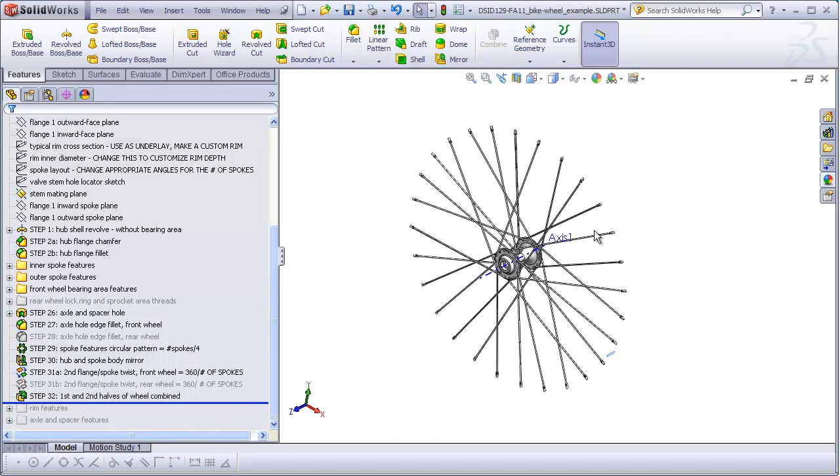This is part 4 of the bicycle wheel tutorial. In part 3 we got all the way to step 32, which gave us a full complement of spokes and a completed hub shell for the front wheel, which included the axle area, the flanges for the spokes, and the area that contains the bearings. For this part we will complete the front wheel by adding the rim.

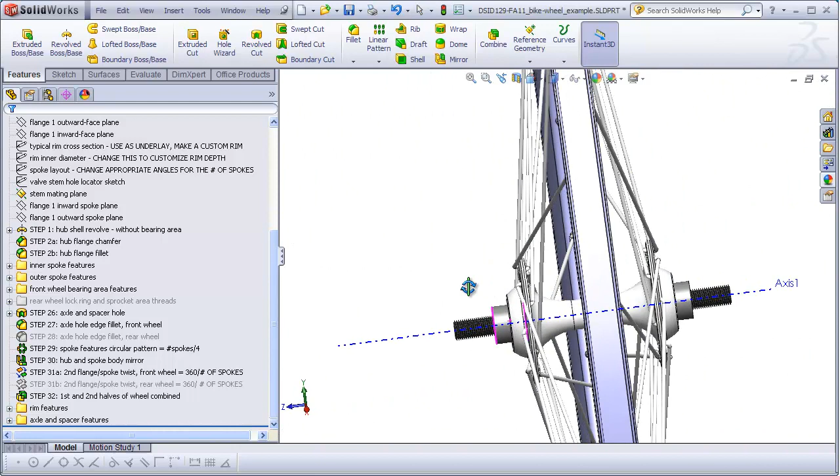This includes holes in the rim for the nipples to pass through, a hole for the stem valve, and then we'll complete all the features that go into the hub, which includes the axle with a metric 10 thread on it and the spacers that go into the bearing area.

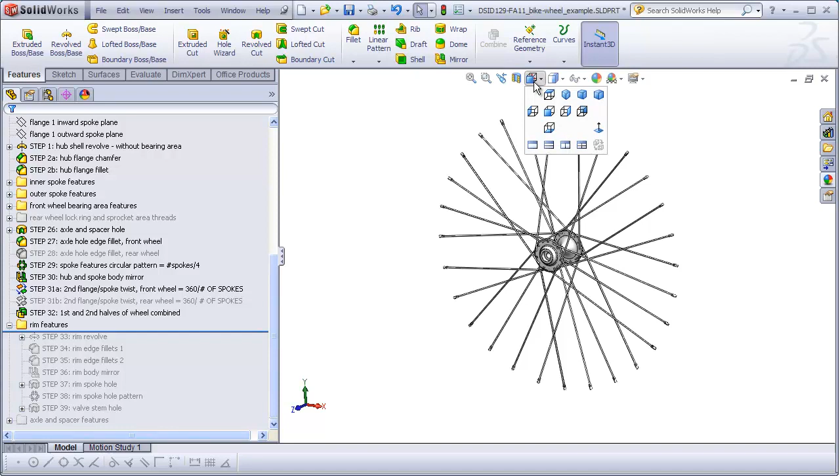So I'm going to roll the model back to step 33, which is the revolve that creates just half of the rim. Now I'll roll back before that so we can recreate this step. What I'm going to do is turn on my sketches for the typical rim cross section and the rim inner diameter.

Let's take a look at the rim cross section. This is your typical cross section of the end of a rim, which includes the feature that clinches onto the tire, 19mm width, which you will not be changing, an 11mm sidewall. And a classic bicycle rim tends to have a little bit of a crown to the inside of the rim.

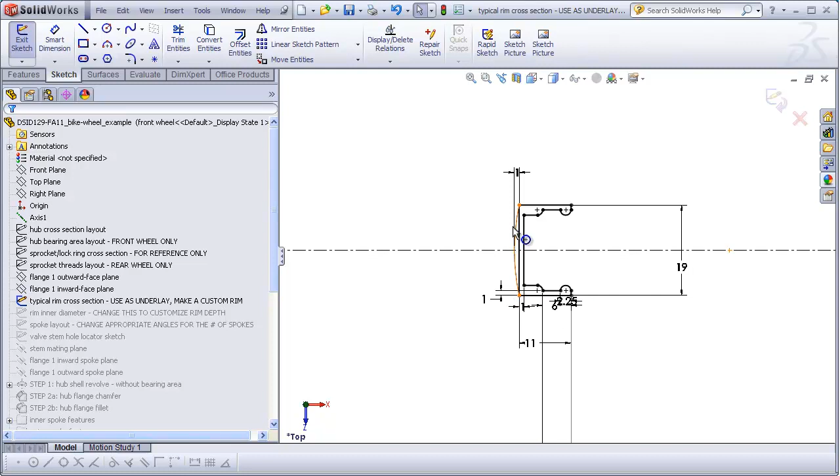This would be a traditional shaped rim, and you can go ahead and use this, but you can also customize this by making it more of an aerodynamic shape if you like. So what you'll be doing is borrowing these features, which must remain unchanged, and then adding more shape to it if you like.

A lot of bikes utilize this flat surface as a brake surface. If you would expect your bike to eventually have brakes on it, then you want to leave this area flat and then add the aerodynamic portion out here.

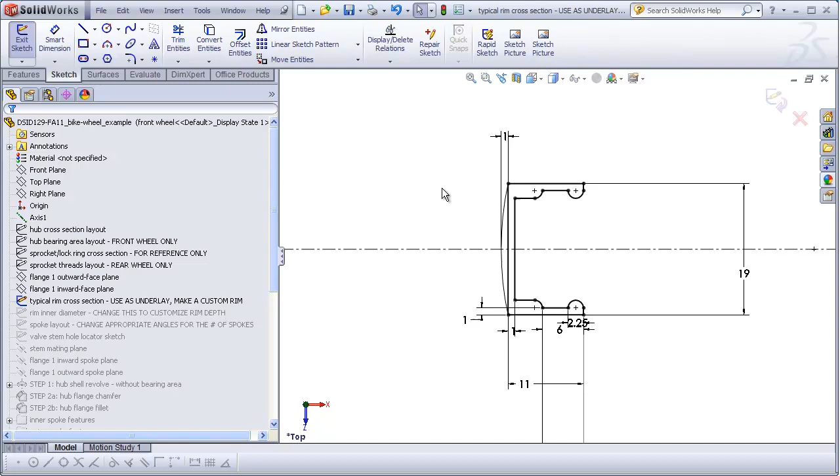If you don't expect your bike to ever have brakes, or perhaps would have disc brakes, you sometimes find rims where this surface here is not flat and is just part of the overall curved rim. You can do whatever you like, but you need to maintain this inner shape here and these shapes here.

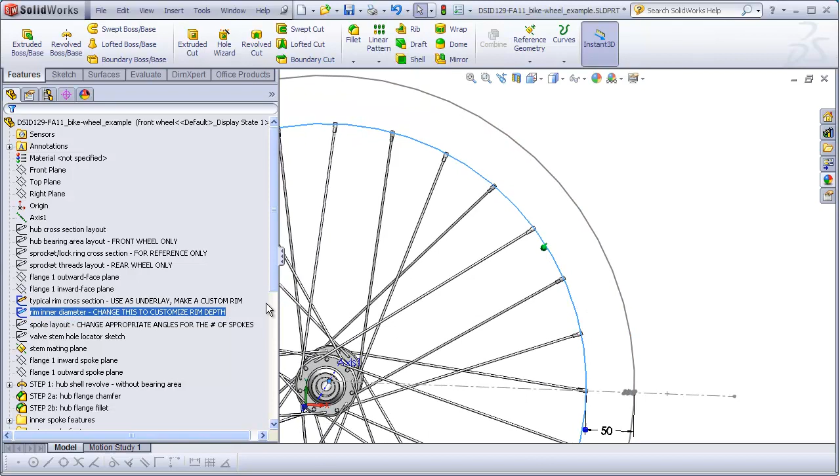Now zooming out a little bit, and taking a look at the rim inner diameter, this dimension controls the depth of the rim going from the outer edge of the rim to the inner diameter.

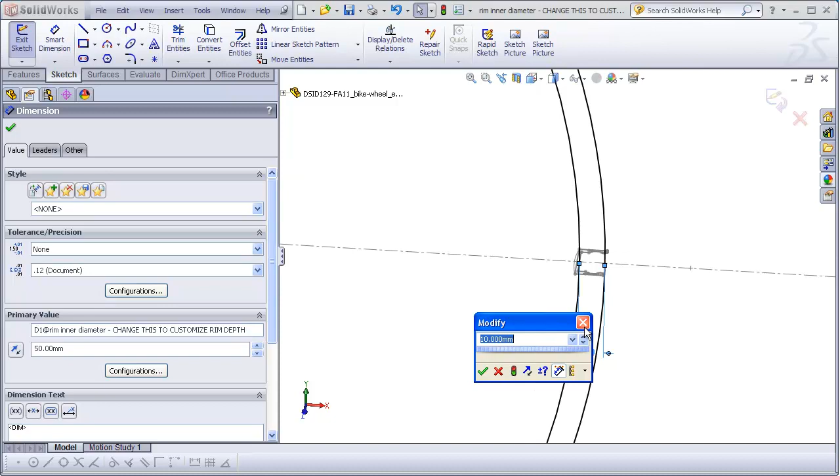A deep aerodynamic rim would have a large number like 50. A more traditional rim would have a much smaller number like 10 or 12, and would end up, if you want to have a crown to the top of the rim, matching the crown. This is a number that you will set, and this curve here, this inner diameter, will end up controlling the shape of your rim in this area, which I'll demonstrate in a few moments.

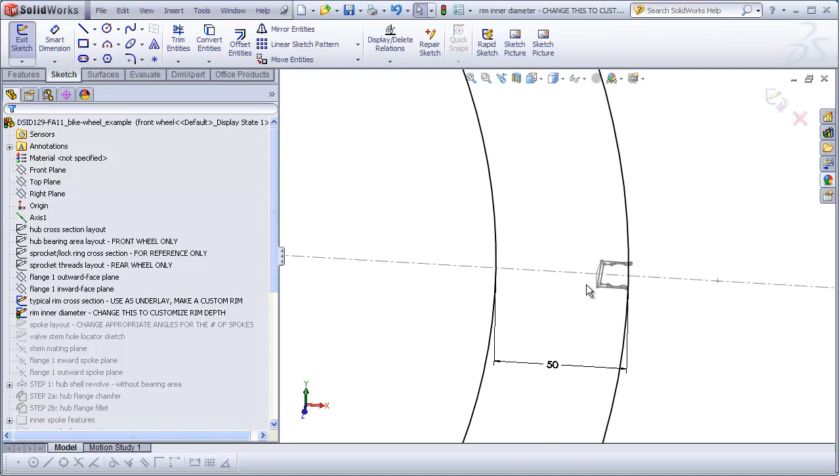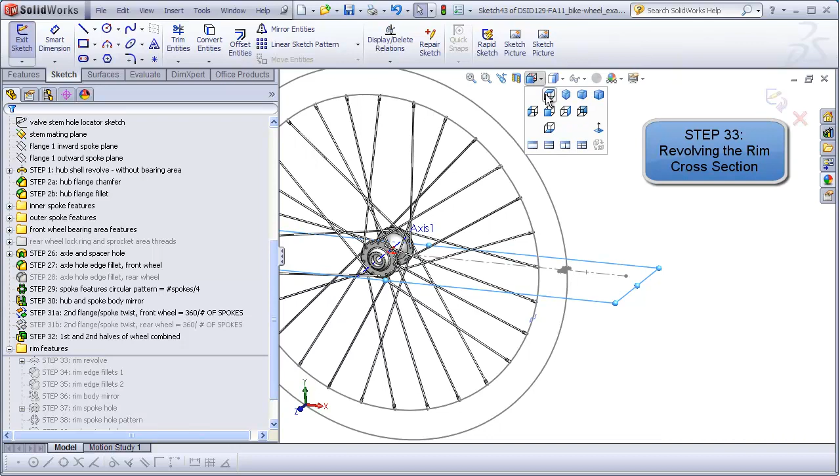So going back to our top plane, we will start a new sketch. This is step 33 we are now working on. From the top view, what I'm going to do is copy these portions of the rim, and then I'm going to add on the additional profile that I want to have.

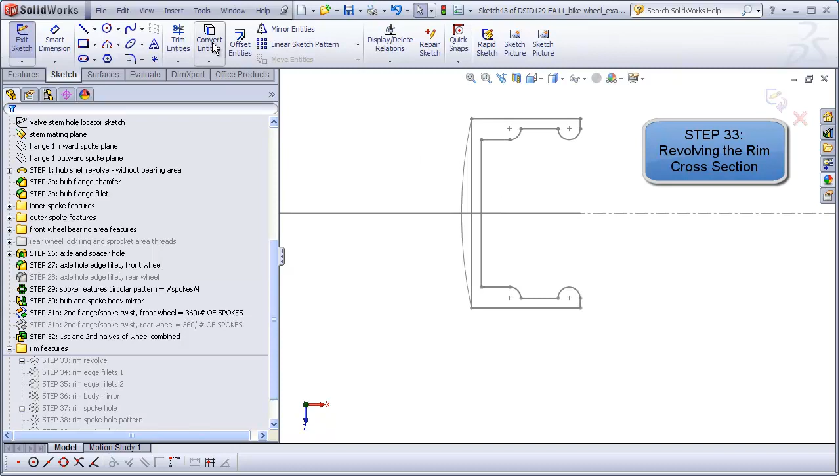In this case, I've decided I want to have an aerodynamic rim, which will have a sort of teardrop shape in this area. Using convert entities, I will copy these portions, and then what I'm going to do is add the curve that will complete half of the shape of the rim. I'm going to drag this back to here.

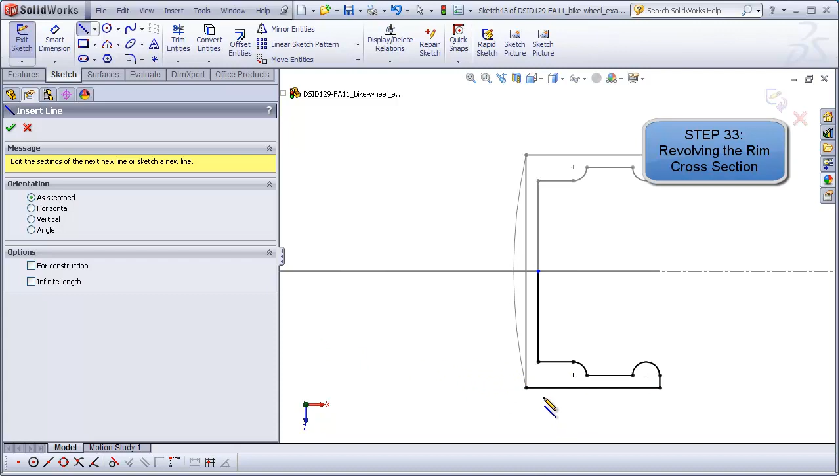A lot of rims, if this area is flat, actually have a little bit of a step before they go to the aerodynamic portion. That's because this area is machined so it's nice and flat for the brakes. So I'm just going to add a short step here.

I'm going to tilt this so that we can see that sketch that controls my inner diameter. So this was a decision I had to make earlier as to what this appropriate depth was going to be, because this also controlled how far out the spokes came on the wheel.

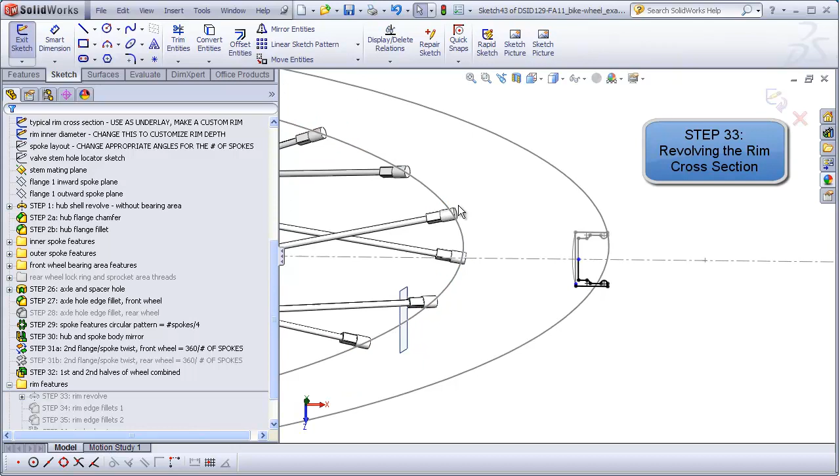So I'm going to just draw a line here. Then I'm going to draw something simple like an arc. I may need to make sure that this line comes out to this inner diameter. So I'll just take this endpoint and this line and make a pierce relation.

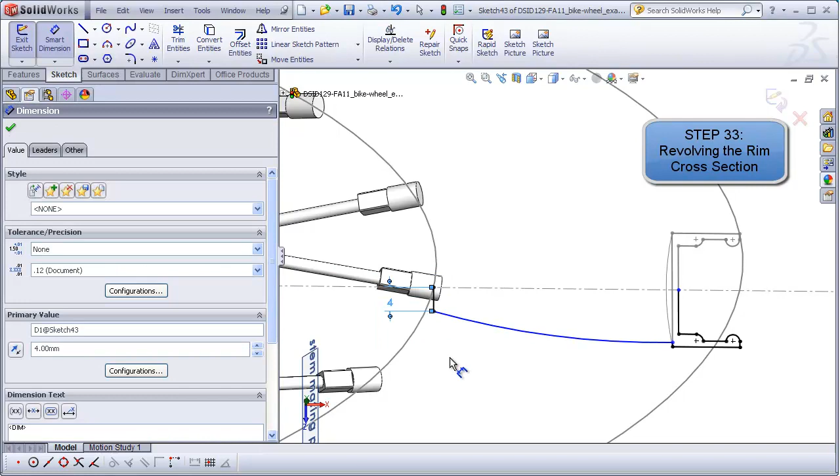And I'll make the width of my rim somewhere about 4 millimeters here. Actually, it'll be 8 millimeters once it's mirrored. And I think I'll add a horizontal sketch line here, construction line, and just make these two tangent.

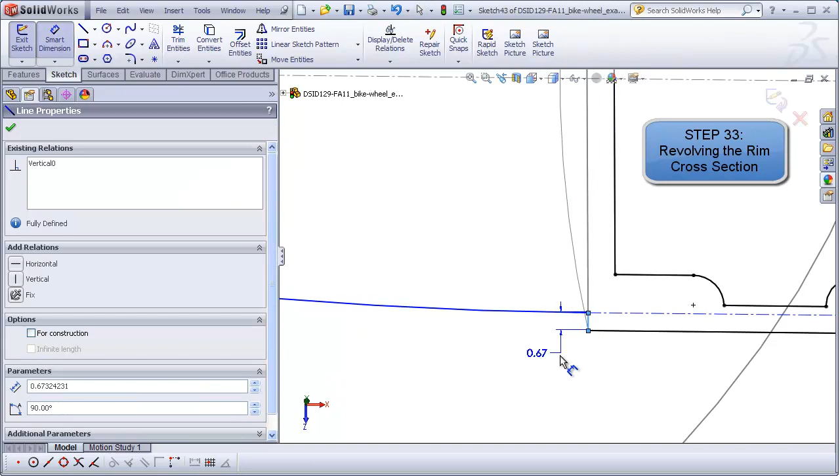Drag that inward. I said I was going to have just a little step here, maybe 0.5 millimeter. Typically on a rim, this area is painted or anodized, and this area here is machined and left free and clean for the brakes to rub on. Then I'll just complete this by adding a line here to here.

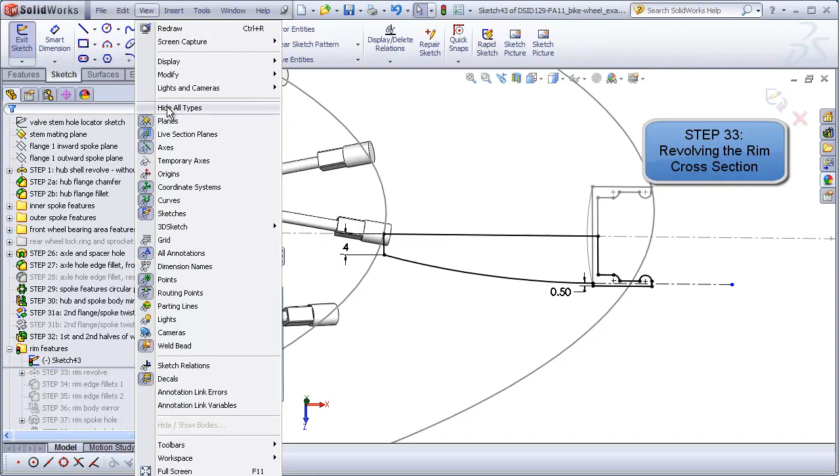Let's turn off all my sketches so now we can see what the profile of half of my rim is going to look like. We copied these details and added these parts on, and this part has a pierce relation to the inner diameter, or the rim sketch, which is this sketch here.

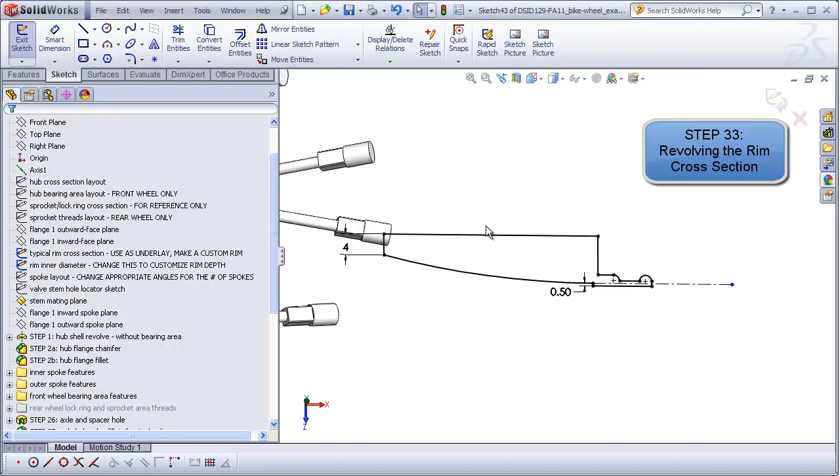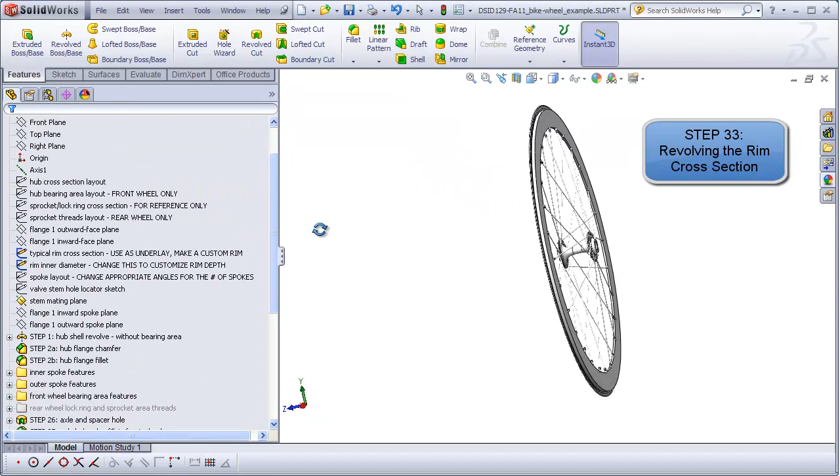All we have to do now is revolve this around the center axis. Now in a real rim, this area would be hollow also, but we're simplifying this a bit and just leaving it as a solid chunk because we're not going to be seeing this interior anyway. So all I have to do now is add a center line going from the origin out to here, and go ahead and revolve that. That gives us half of the rim.

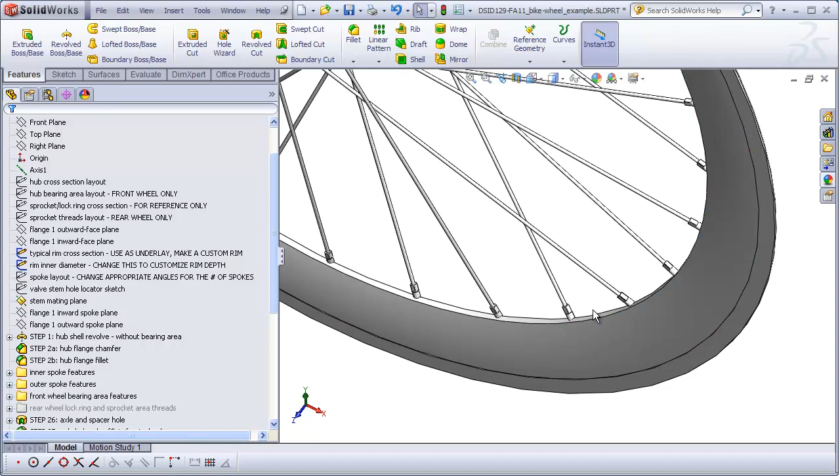Now this is a pretty extreme depth. Usually a rim with this great a depth has fewer spokes, so you might want to make yours not quite so deep. There are other shapes you can consider - some are fully rounded over on the top, others are more triangular shaped, and don't have to have this rounded side. So this is your opportunity to do a little bit of customization.

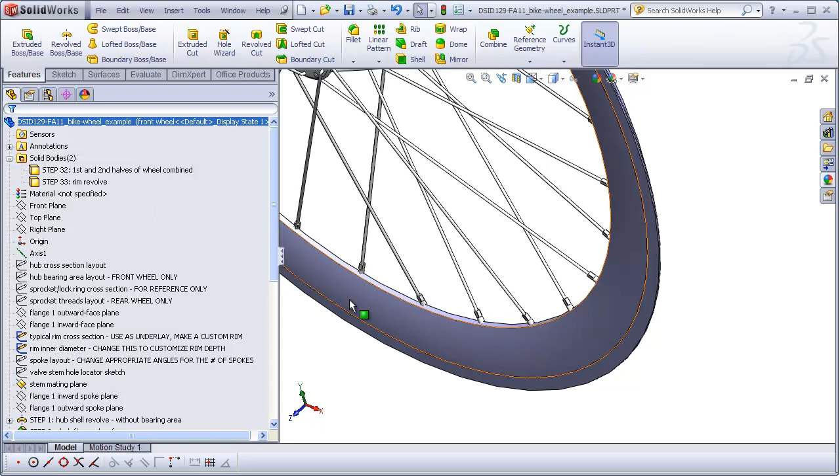I've gone ahead and changed the color of the rim body to something other than the spokes to help me see it a little better. And I'll use that opportunity to mention that when you revolve the rim, leave it as a separate body. In other words, going back into the feature here, leave merge result unchecked.

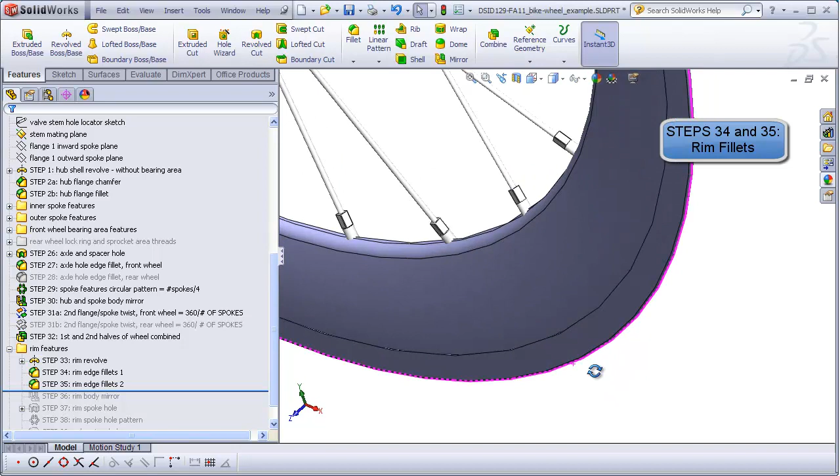Now for steps 34 and 35, we'll just add some fillets if necessary, depending on what you need for your rim. So I added a fillet here at the top edge, and another fillet to remove this sharp edge that otherwise would have been on the outside edge of the rim.

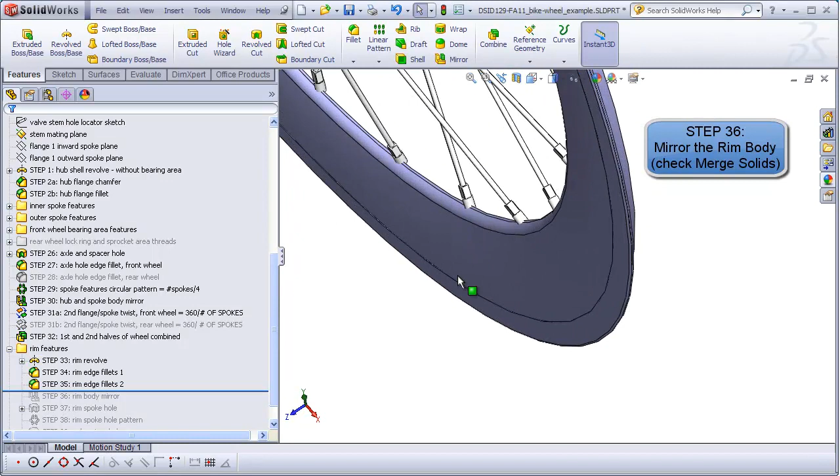The next step is just to mirror this rim body, and again this is an important reason for keeping this as a separate body. So we will use the mirror command, and on the front plane use that as our mirror plane, and the body we will mirror is the entire rim.

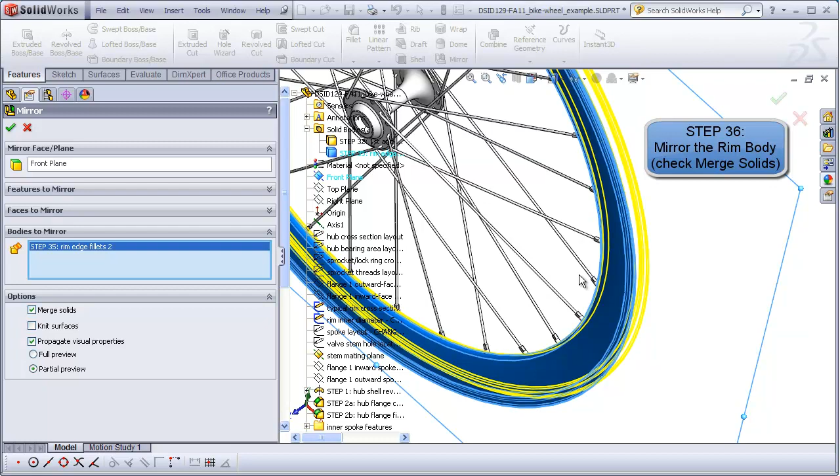And if we use merge solids, what it should do is merge the copy of the rim only to the original. It won't merge it to any of the other features that it might at the moment be intersecting. So there we have the full rim. It still has remained as a separate body, even though we used the merge, because it merged one half of the rim with the other half, but left it unmerged from the spokes.

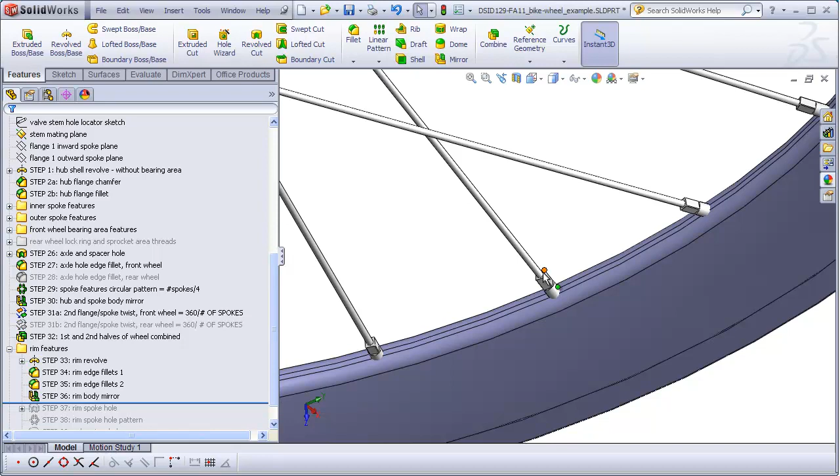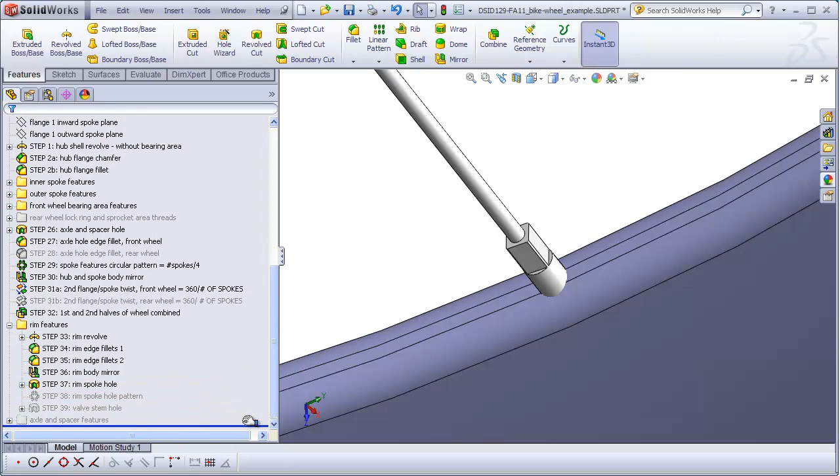So we can see here that the nipples for the spokes just sort of disappear into the rim without any sense that there's actually a hole that these enter into. You can see there's no hard edge indicating the end of the rim where a hole would be for the spoke to go into. So what we're going to do is add spoke holes and pattern them. Then you can see a definite sharp edge where the blue of the rim ends, and a hole that allows the end of the spoke to enter.

So let's go ahead and roll back these features and recreate them. What we need to do is create a set of holes around the perimeter of the rim that matches the same spacing as the holes of the spokes entering the rim. To do this, we need to go back to our spoke layout sketch, because this controls the location of all our spokes. So let's turn on that sketch and hide the others. Zoom in here.

You recall that the layout sketch for the spokes gave us the locations of just the first two spokes, an outer spoke and an inner spoke. What we are going to do is make one hole going through the rim aligned with this outer spoke, then pattern it 28 times around the perimeter. We don't need to add the inner spoke hole because it will be on the same spacing as all the other spokes, so just one hole patterned 28 times will give us everything we need.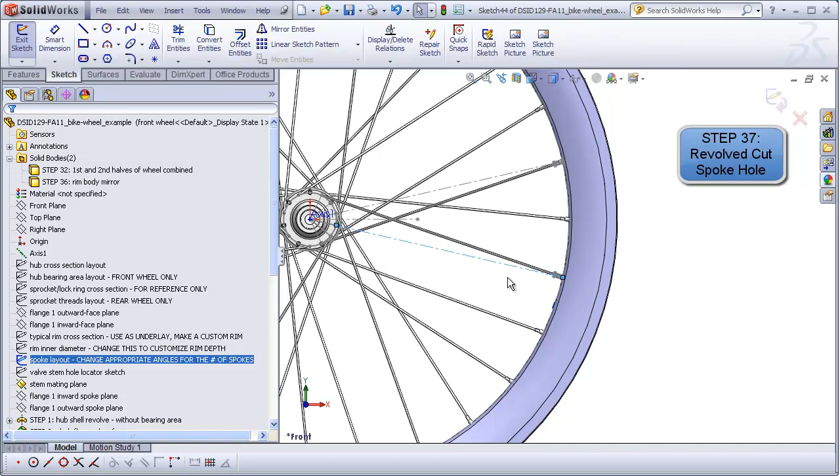So we will make a sketch on the front plane. Actually, we've already started our sketch. We're going to copy this line from our spoke layout sketch. This line goes all the way to the center of the wheel, radiates outward, and goes to the rim where this spoke enters it. So convert that entity. I'm going to change it to a construction line, then hide all my sketches.

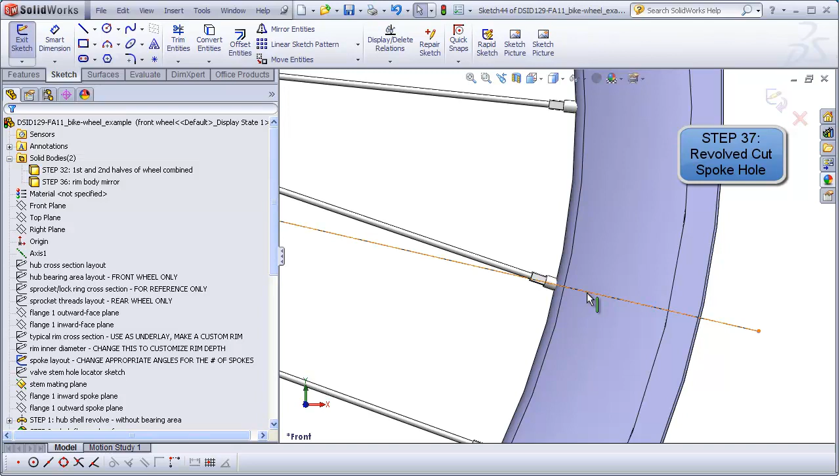I'm just going to drag this out where I can see it a little bit better. What I want to do is revolve a hole that is centered on this construction line and make it big enough for the nipple of the spoke to pass through. The nipple is 4 millimeters in diameter, so we'll purposely make the hole a little bit bigger so that this funny angled nipple will be able to enter and have clearance on both sides, even though it's not completely in line with the hole itself.

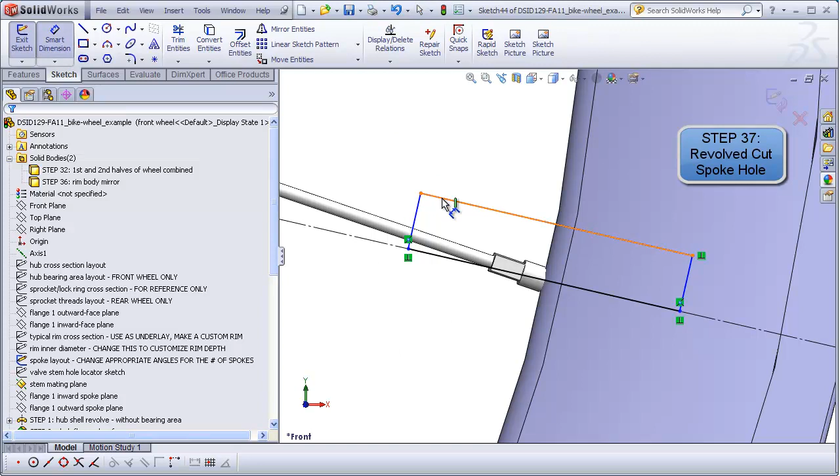So I will just draw a rectangle here that has one edge on my center line. Make these lines perpendicular, let's turn on our relations. What I want to do is make this hole a diameter of 4.25 millimeters, so that'll be a little bit larger than the nipple. I'm just going to drag this way out here so you see that this is well beyond the inner and outer diameter of the rim.

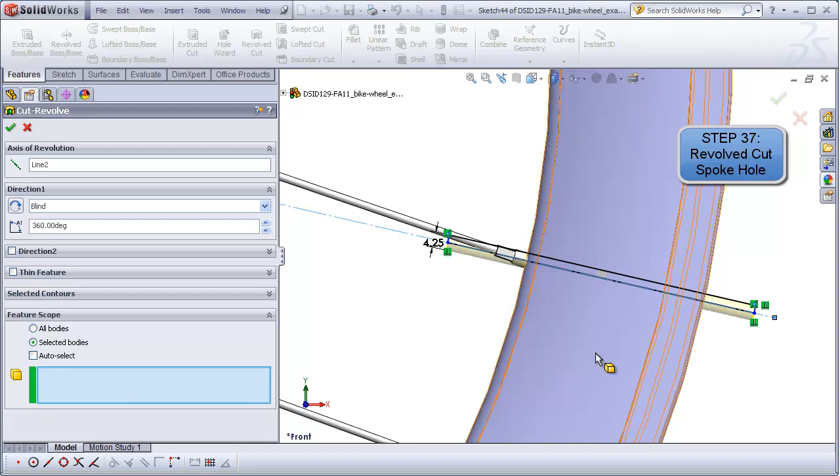Then I'm just going to do a revolve cut. I need to make sure that this cut only cuts the rim, so I want to go to my feature scope and open that up. If all bodies or auto select is selected, unselect that and have selected bodies checked. That will open up this box here. We are going to select the rim to be the item that will have the hole put into it.

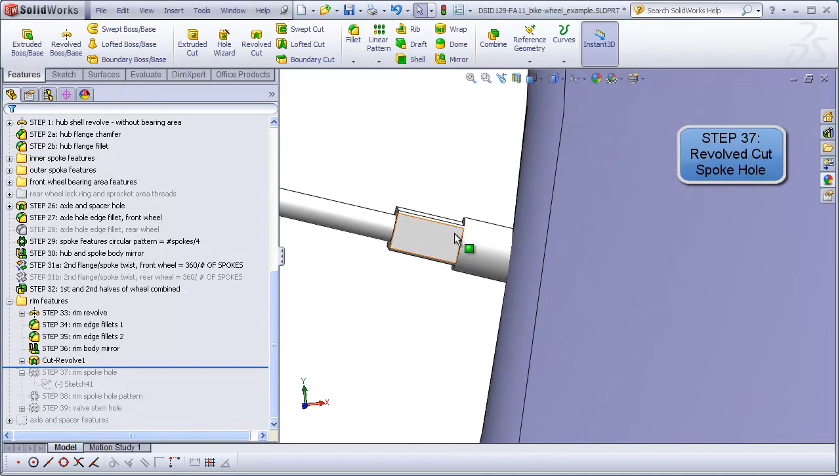So now we have, for step 37, our first spoke hole. We see that even though this is entering at a funny angle, we made the hole just a little bit bigger so that it doesn't bind up. We see that these side surfaces do not bind up as they are entering this hole.

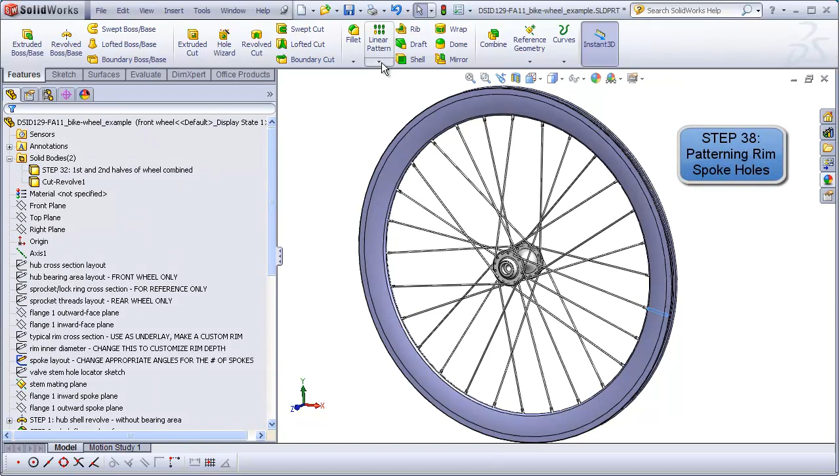Now it's just a matter of patterning this around the entire rim. We remember that we have 28 spokes, so we need 28 holes. So we are going to pattern this revolve cut, in other words the hole in the rim, about axis 1. Selecting circular pattern, axis 1, the revolve cut is already popped in here because I pre-selected it. We need a total of 28 holes.

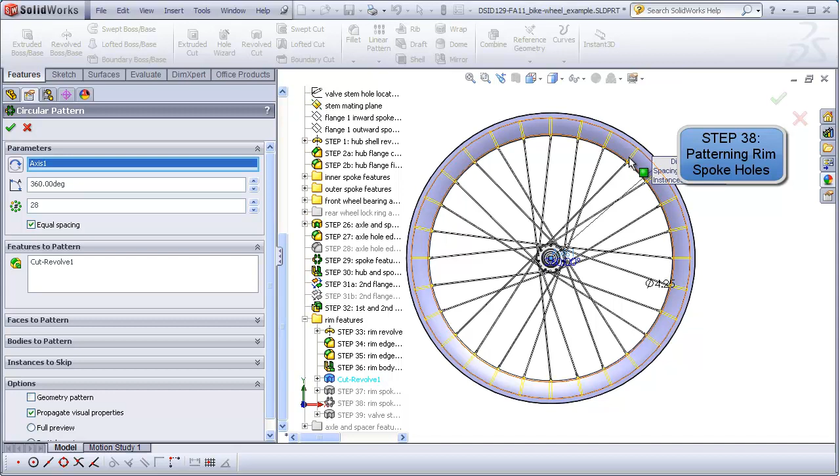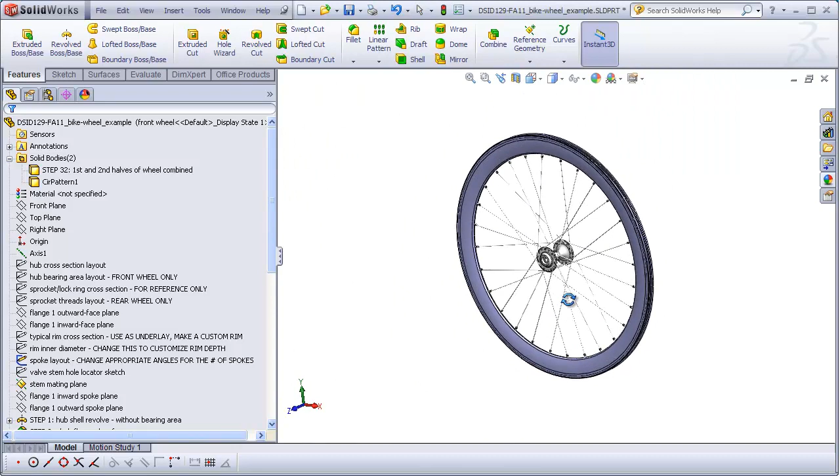We can see in the preview how the holes are aligning with the spokes. We go ahead and finish that, and here we see on every spoke there is a matching hole. So we have to make sure that the total number of holes patterned matches the total number of spokes. Later on, when we go to change configurations to the rear wheel, we're going to have to change the total number in the pattern to match the spokes that we're going to put into the rear wheel.

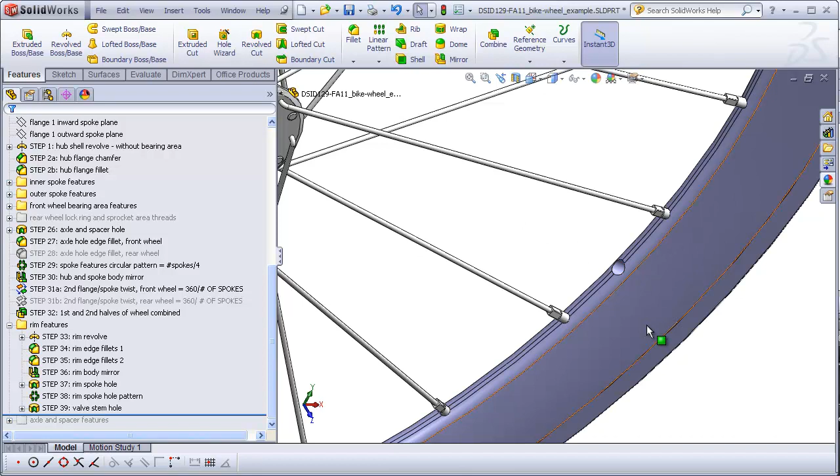So we've just completed steps 37 and 38. Step 39 is to add the hole in the rim that the air valve stem is going to pass through. If you look at the way the spokes are arranged, as I mentioned before, they tend to clump in clusters of 4 spokes.

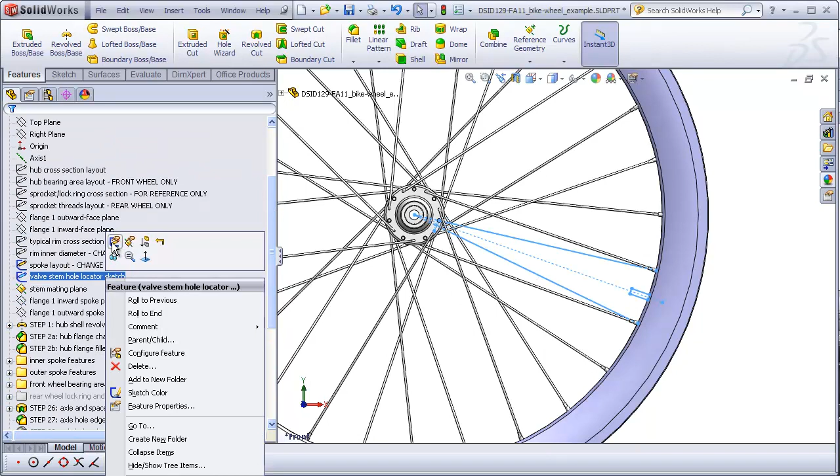It's always desired that the valve stem go between the two spokes which are approximately parallel to each other, because this gives more room to get your hands inside when you're trying to pump up the tire. What I've done is made a sketch that automatically puts that valve stem in the proper location between the spokes.

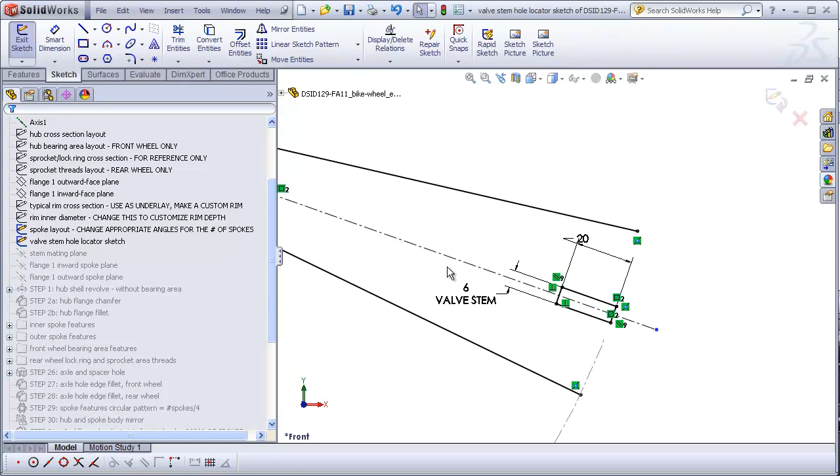So all you have to do is use this sketch to make a revolved cut, which will give you the hole that this valve stem will pass through. This will automatically be aligned regardless of the number of spokes that you choose for your wheel. So let's get out of here and roll that feature back so we can recreate it.

So what we're going to do, I'll zoom in on this area so we know that the valve is going to go here. Turn my sketches back on. We can hide the spoke layout sketch and make visible the valve stem hole locator sketch.

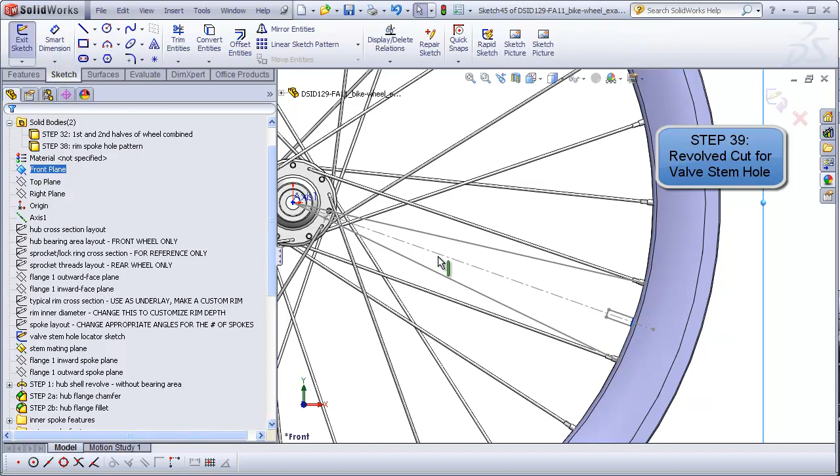And on our front plane, make a new sketch. We're going to take this center line and copy it into our sketch. Let's drag this out a little bit so I can see it out here. Turn this into a construction line.

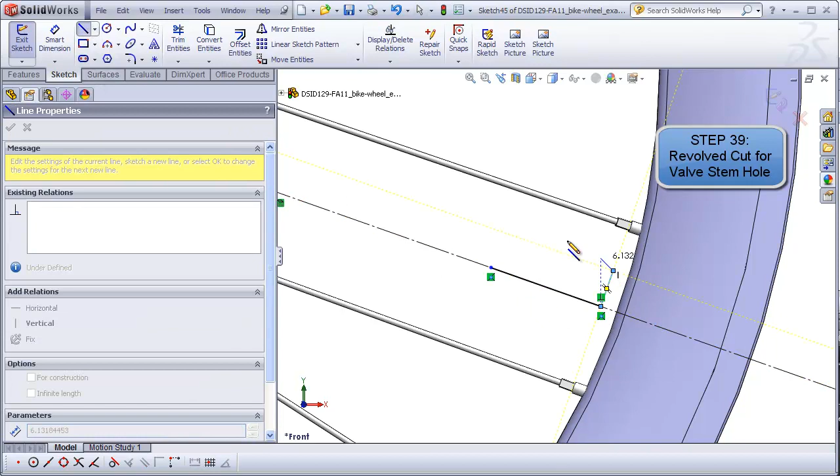Let's go ahead, hide our sketches. And like before, I'm going to draw a rectangle. Just drag it out here somewhere so that it's well beyond the bounds of the rim. And I'm going to make the hole one quarter inch in diameter.

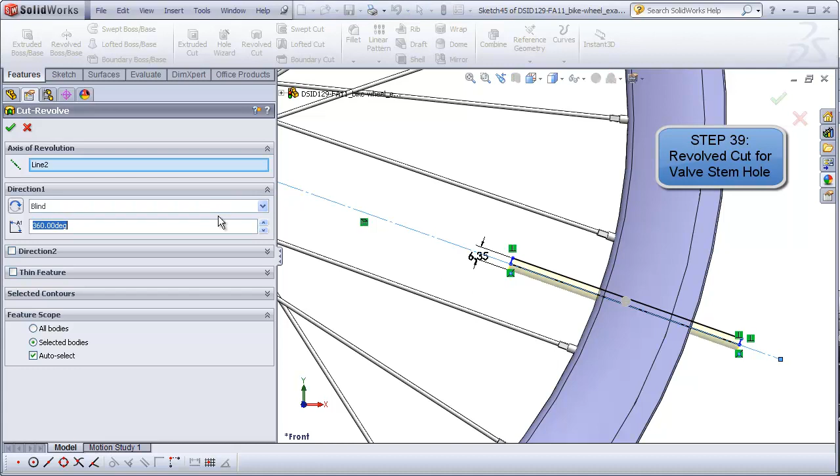That's the same thing as 6.35 millimeters. And once again, we're then just going to go ahead, make a revolved cut. There's our hole for the valve stem.

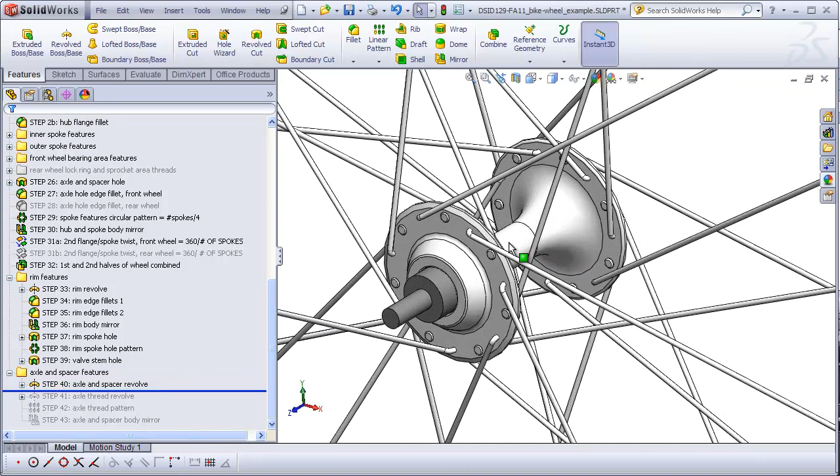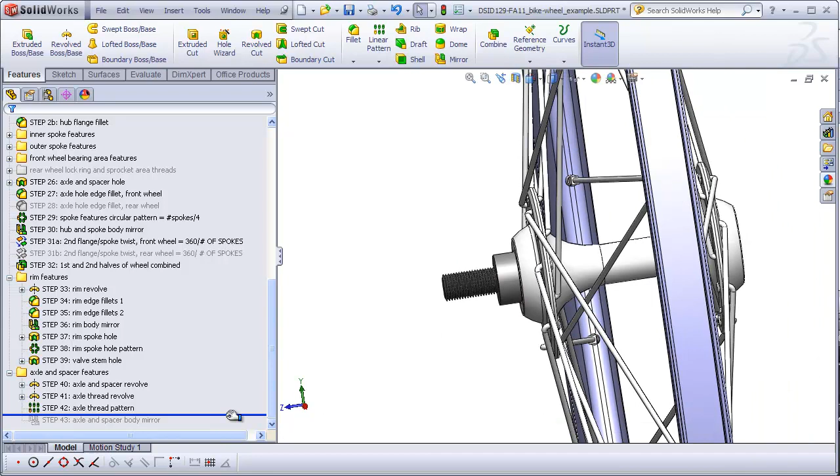So we're coming down to the last few features of our wheel, steps 40 through 43, which I'll just slowly roll through, and then I'll go back and recreate each one. Step 40 is adding the bare axle and the spacer. Step 41 is to add a single screw thread onto the axle. Step 42 is to pattern those screw threads. Step 43 is to mirror the axle and spacer body to complete the other side, and that will complete the entire front wheel.

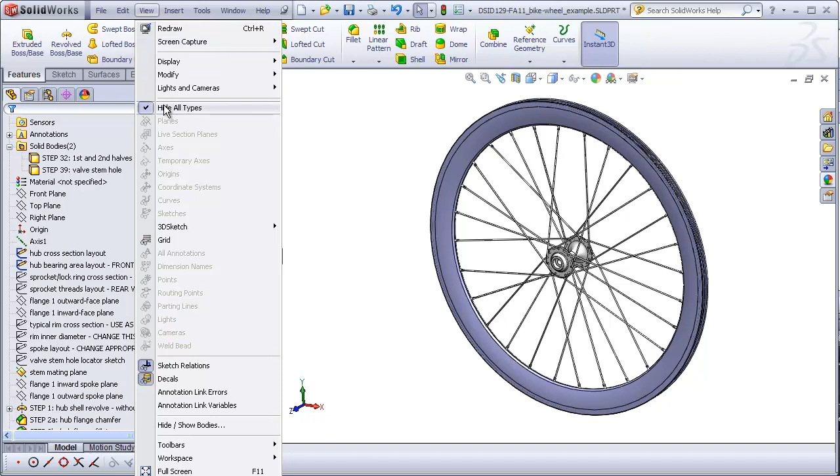So rolling back before step 40 so we can recreate these steps, what we want to do is have our hub cross-section layout, our hub bearing area layout for the front wheel visible. So looking from the right plane, we can see the sketch for the axle passing through and the spacers that go into the bearing area.

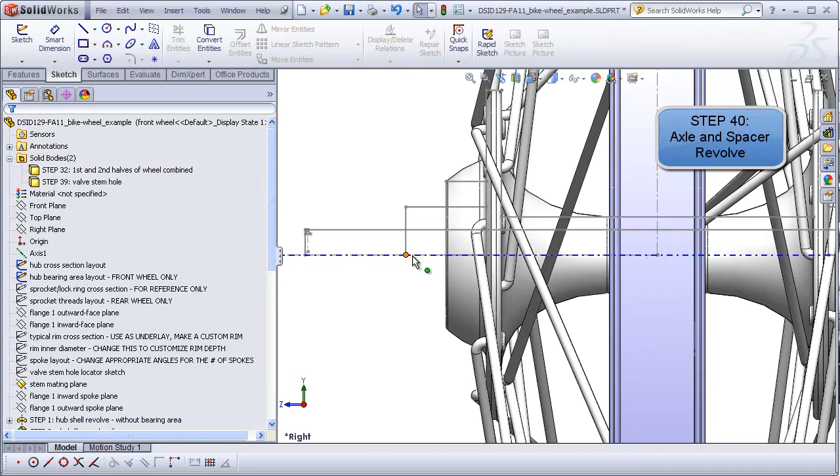What we are going to do for step 40 is to revolve one half of the axle out to the center of the wheel and at the same time revolve the spacers. Now the axle has threads added to it, and we have in our layout sketch a representation of one single thread.

When we revolve the axle, we are going to revolve the smaller diameter of the axle, not the outer diameter that includes the tip of the thread. Later, we are going to glue the threads on and pattern them, which will bring the axle up to its full diameter.

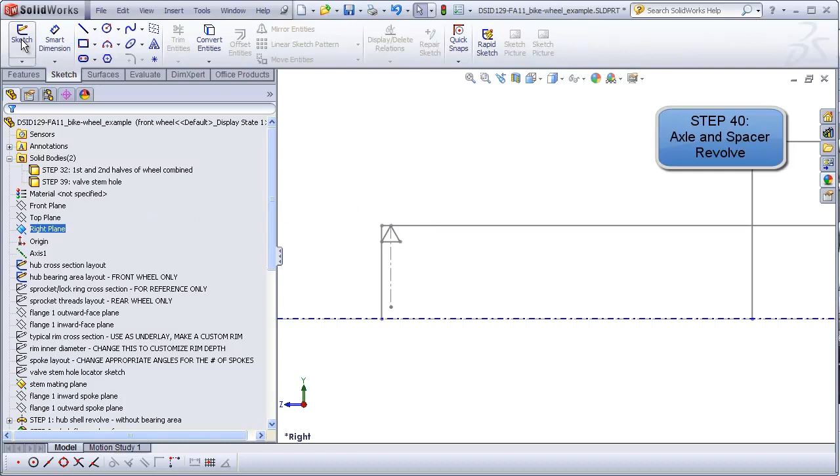So now, beginning step 40, new sketch on the right plane. I'm going to copy several of these lines using convert entities. I'm going to copy this line, not this line, this one. There's one here that's difficult to see.

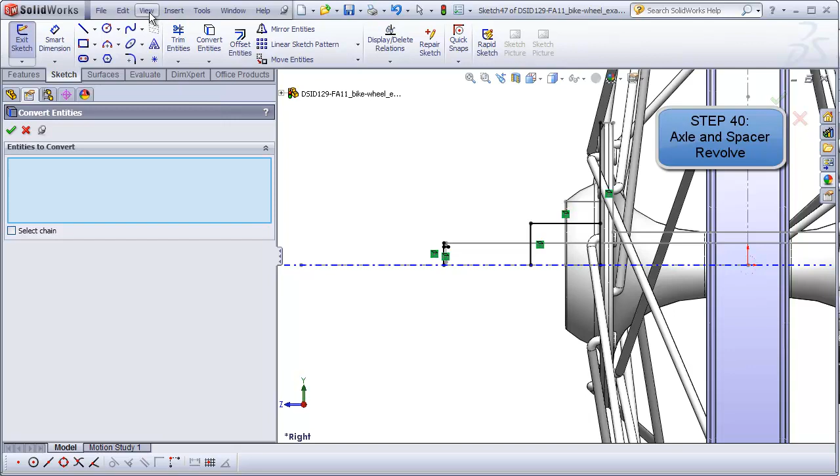And we can go ahead and copy this center line here. Actually, we'll just leave that alone. I'm going to hide all types, and I'm going to add a line here, a vertical line here at the middle of the wheel. I'm going to take this line, which represents the axle, and drag it all the way out to here.

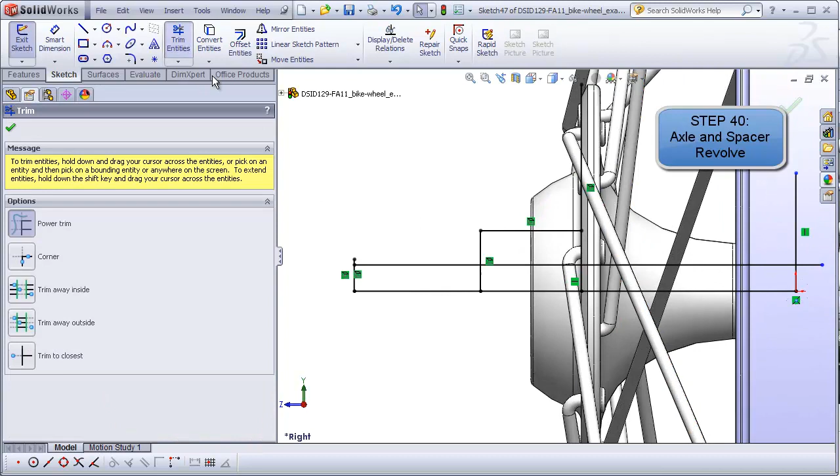Now it's time just to do some trims to get rid of some of this excess material. So we'll get rid of this, these lines here. There's a line up here, and a line down here, and this excess material here.

So let's take a look at our situation. This represents the axle portion going through the hub. This represents the spacer, and we're going to revolve this.

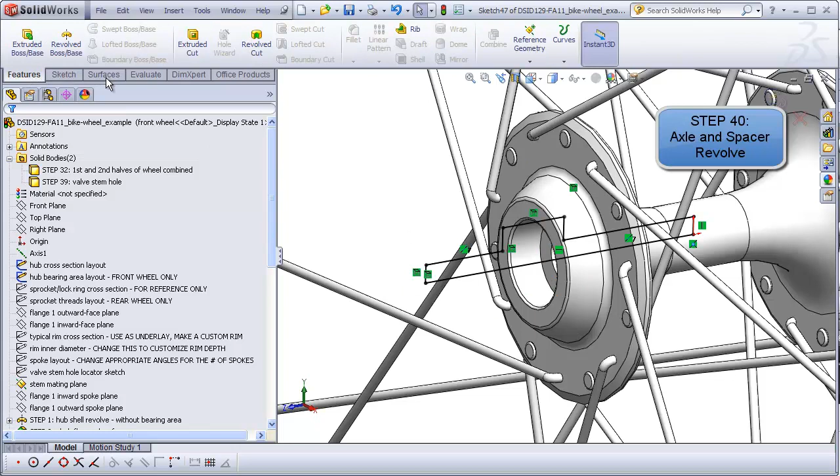So going ahead to our revolve, pick this as our axis. And this is going to be, as you can see, the axle and the spacer. We want to leave this unmerged. I don't think it's going to merge with anything anyway because it's not actually contacting anything.

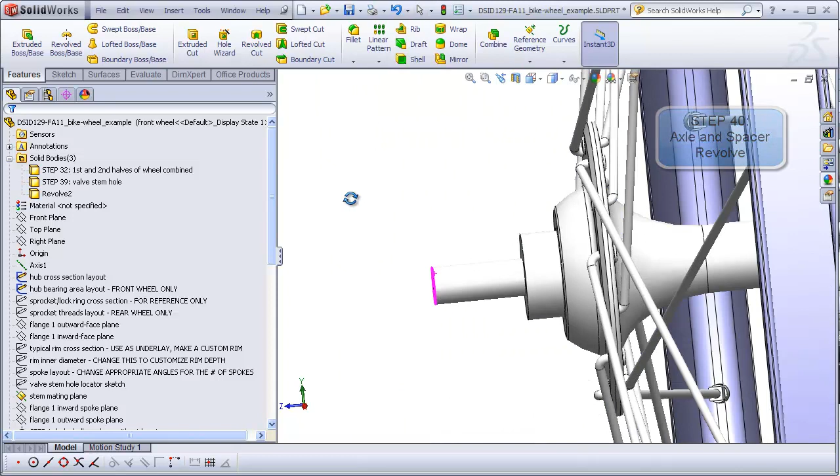So there we have the axle and the spacer, and now for step 41 we want to start adding these threads onto the axle. In reality, the axle and the spacer are two separate parts, but we're just going to treat them as one part for simplification.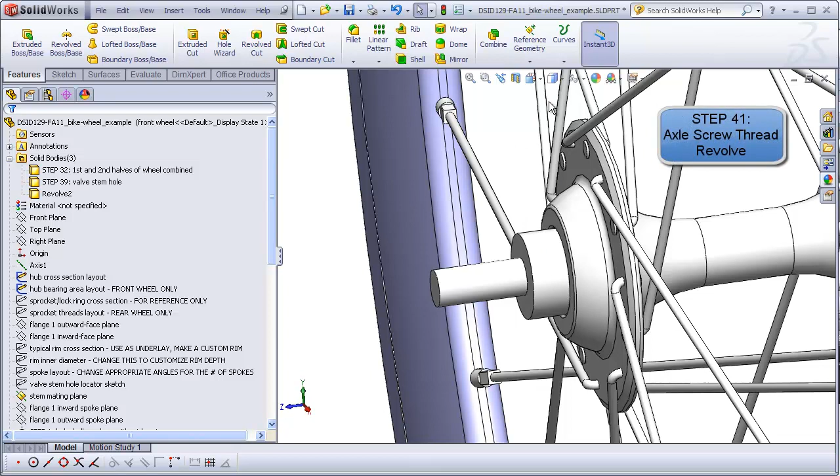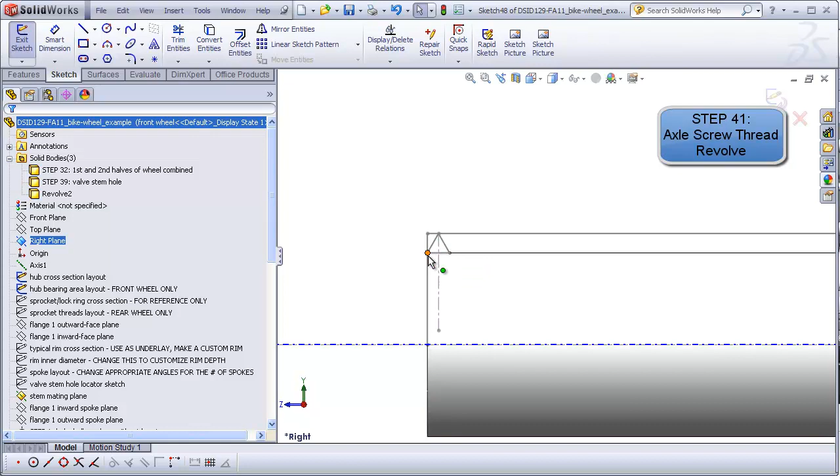Let's take a look on the right plane again. We'll zoom back in, turn our sketches back on. What we want to do is add just one single tooth for step 41. So on our right plane, start a new sketch. We are just going to copy this one triangular tooth profile using convert entities.

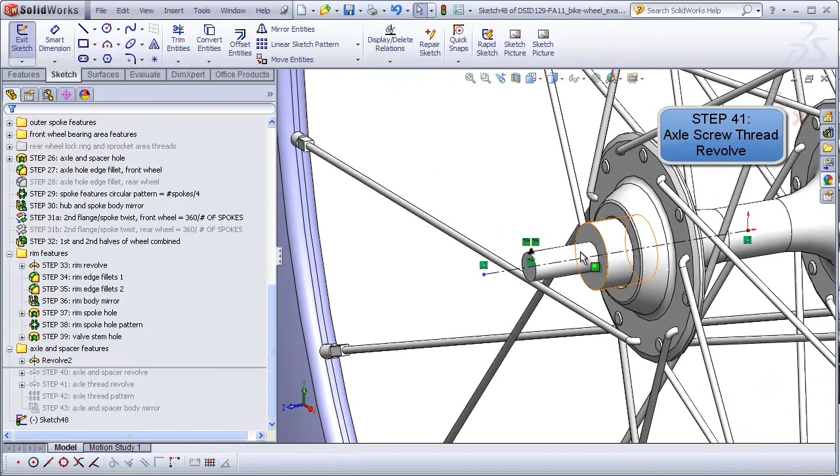We're going to revolve that about an axis passing through the origin. Let me hide all types so we can see what we've got here. Here's our axis, and this tooth is going to be revolved around the shaft of the axle. So we're gluing this tooth on using revolve.

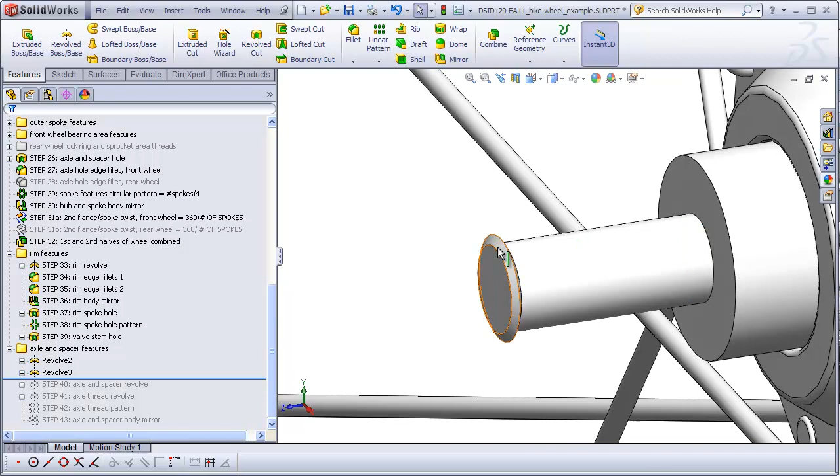We're doing this as a separate feature from these revolves because we also need to pattern this going in this direction. So now all we have to do is pattern it over.

But before we do that, let me talk for a minute about what we're actually making. We are going to be making an axle with a metric 10 thread that has teeth spaced at 1 millimeter apart. This is what we call an M10 by 1 millimeter thread. English threads give us teeth in threads per inch, while metric threads just tell us the spacing between threads, which is more convenient for our purposes.

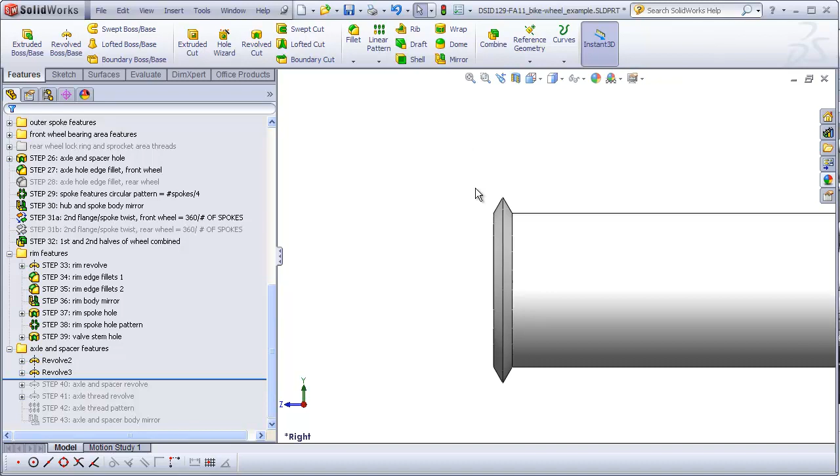So we're going to pattern this in this direction. I'm going to use a linear pattern along axis 1. The feature we're patterning is our one thread. You want to reverse the direction here so it's going this way, and the spacing between threads is going to be 1 millimeter because this is an M10 by 1 millimeter thread.

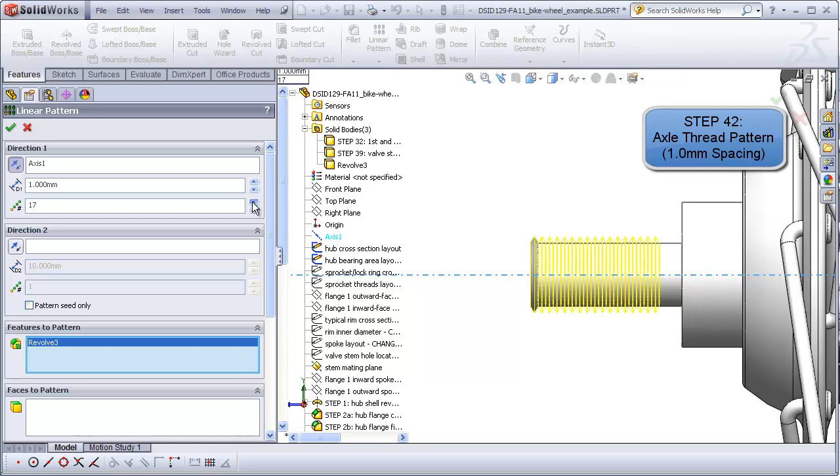So we're just going to keep adding threads onto this until we fill out this whole area. Now it might turn out for the rear wheel that we need more threads for the longer axle. So if we later change to the rear wheel configuration and find the threads aren't going far enough, we might have to go back and change this number. For now I'll just leave it at about 21.

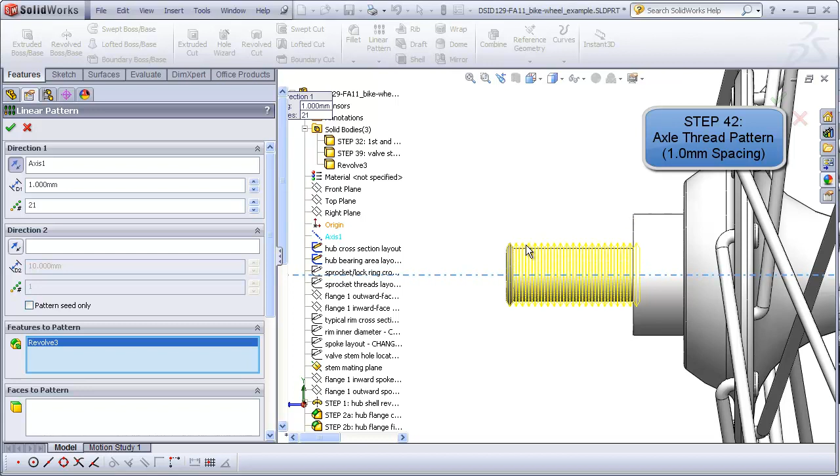And you see that these threads go all the way into the body of the spacer. We won't bother threading all the way to the end here because no one's going to be seeing that anyway. So completing this, there's our threads. So now we have a body that includes the axle, the threads patterned on it, and the spacer.

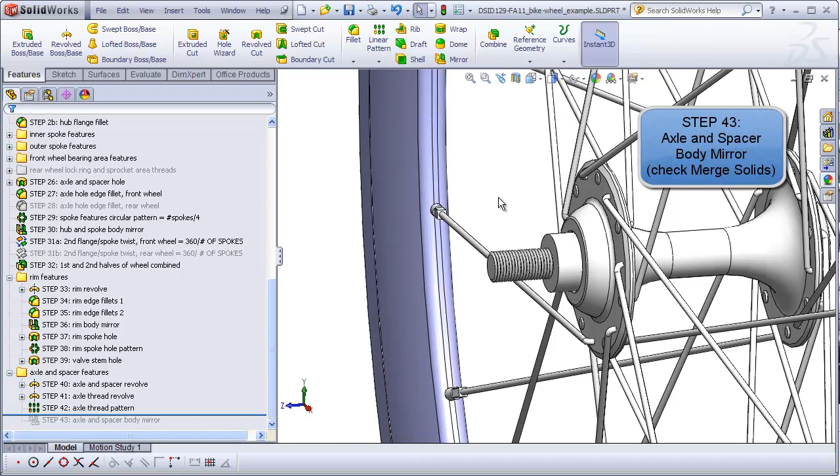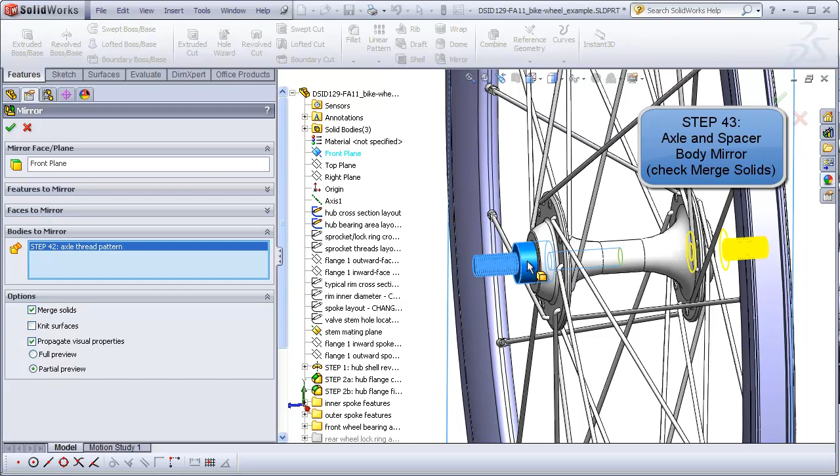Our final step, step 43, is just to mirror this body, and that will complete the front wheel. So going to mirror, we will select our front plane as the mirror plane. This time we were going to mirror a body, the one we just created. We want to choose Merge Solids, which will only merge the newly created body to the one it was mirrored from, not to any other body. That completes the wheel.

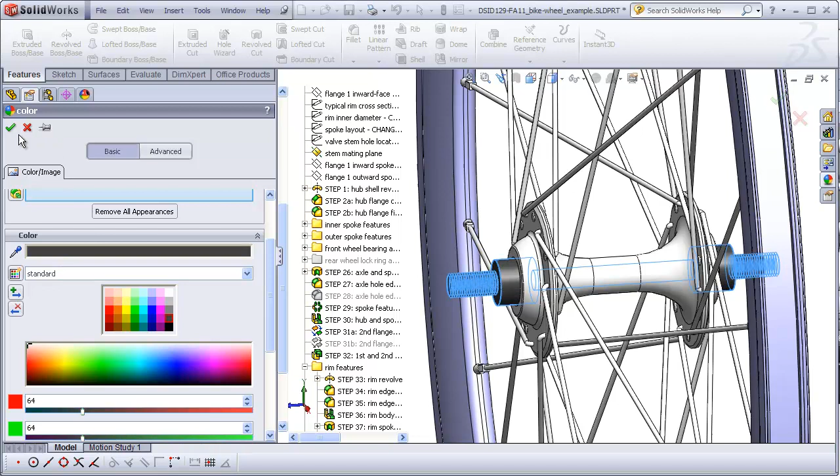But before we're completely done, because we kept these as separate bodies, we can easily give them different colors. For example, it's typical to find the axle and spacers on a wheel to be a darker black or charcoal color. So I can go to this body here, which represents the axle and spacers, right click, go to Appearances, and choose the body. That opens up a palette, and I'll choose a color like this or maybe like that to give me that darkened axle and spacers, which makes this look a little more realistic.

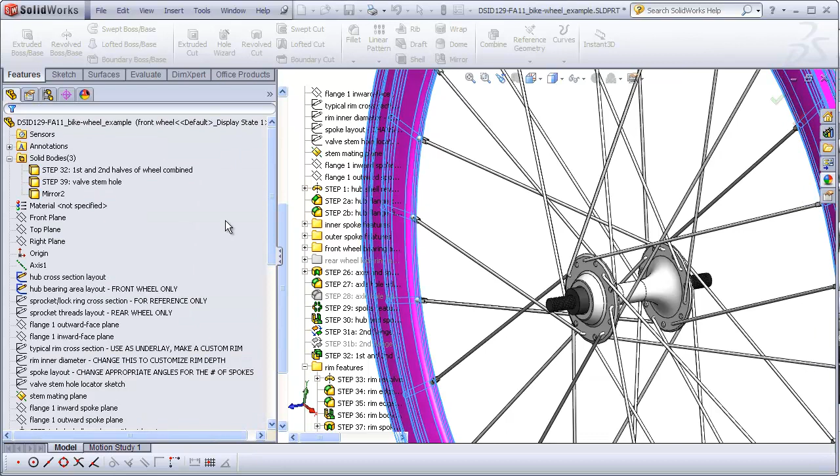Also, by keeping the rim separate, you saw earlier that I had changed the color of the rim, but I didn't really show how to do that at the time, so I can give the rim a completely different color, which you often find on bike wheels, where the rim might be an anodized color even though the spokes and the hub are chrome.

This concludes part 4. In part 5 we'll show how to add the features for the rear wheel, which will complete the wheel part altogether.